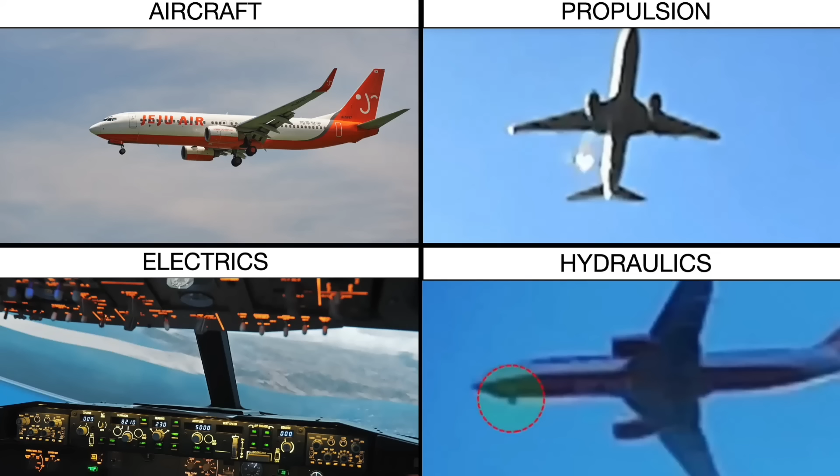Jeju Air Flight 2216 crashed on 29 December 2024 at 09:02:57 local time. The accident occurred at Muan International Airport in Korea. There were 179 fatalities and 2 serious injuries. The airport has been closed for the last 19 months.

A preliminary report was published, which was 6 pages long. An interim report was prepared for publication 7 months after the accident, but withdrawn due to protests by the families of the victims and the pilots' unions.

3 separate system domains now have to be explained: propulsion, electrical and data, and hydraulics and landing configuration. Can one physically credible initiating event explain all 3 outcomes without contradicting the known 737NG system architecture?

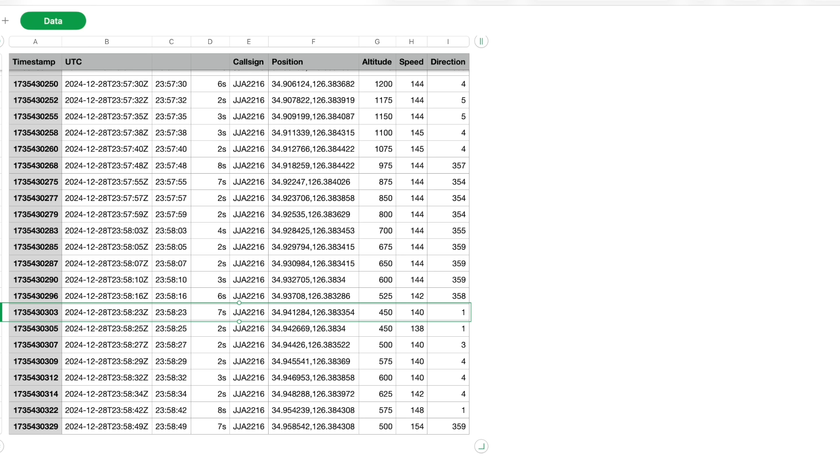The ADS-B trajectory indicates that the go-around had begun by approximately 08:58:23. About 3 seconds later, the KBS imagery captures an abnormal event at the right engine, consistent with the bird strike sequence. Subsequent examination found bird remains in both engines.

Was there more than one bird strike? Within seconds of the bird strike sequence, the aircraft suffered an unexplained loss of FDR, CVR, and ADS-B data. Whether one or both engine-driven generators had been lost at that point remains one of the important electrical questions.

Let's have a look at the aircraft history. The accident aircraft never had any prolonged stopover, downtime, or maintenance in the year before the accident. The aircraft operated on average 5.7 flights per day, with an average stopover time of 1 hour 30 minutes. It appears that all maintenance work was carried out overnight.

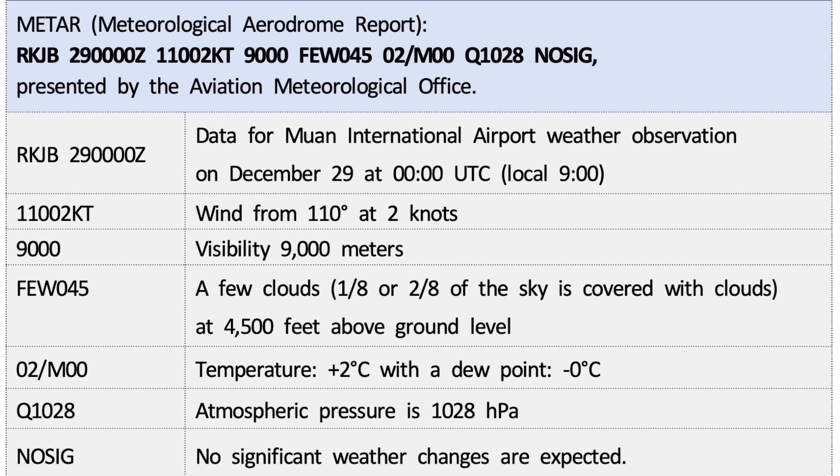The weather at the airport was +2 degrees centigrade, a high pressure of 1028 hectopascal, light winds at just 2 knots from 110 true, a few clouds at 4,500 feet, and 9-kilometer visibility.

The key questions that any investigation needs to answer: Number one, why did both the FDR and CVR stop recording simultaneously during the initial approach? Number two, what electrical power was necessarily available while an engine was still producing thrust? Number three, which hydraulic pumps could therefore still operate? Number four, did normal or alternate braking remain available? Number five, what electrical or hydraulic conditions would actually prevent landing gear extension despite the manual gravity extension system?

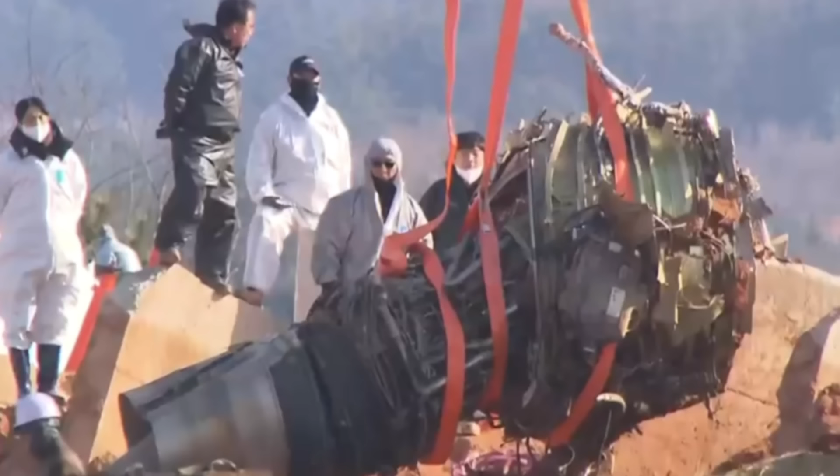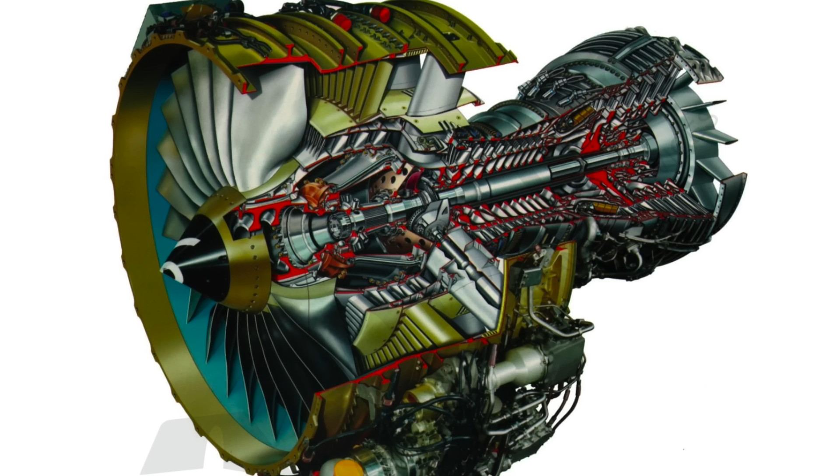Let's have a look at the engines. The accident aircraft was fitted with either two CFM56 7B26 or 7B27 engines. The Korean preliminary report does not specify the engine type fitted to HL8088. The engine identification, therefore, has to be established independently from Boeing, CFM, Ryanair, and Jeju Air configuration records. Each engine has an integrated drive generator with an oil cooling system.

Let's have a look at the radar system. Thales won a contract to install a STAR-NG and an RSM-NG radar system for Muan International Airport. The work was completed on the 31st of August 2024, which is 4 months before the accident. ADS-B stopping does not necessarily mean the aircraft disappeared from ATC surveillance. Muan had installed primary radar capable of tracking a non-cooperative aircraft. The question is, where are those radar data?

The STAR-NG has a 100 nautical mile range, 3D detection, and is an S-band system. The RSM-NG has a 256 nautical mile range, works in military mode 1, 2, and 3, civilian A and C, mode S, and ADS-B, and is an L-band system. That makes the STAR-NG data particularly important.

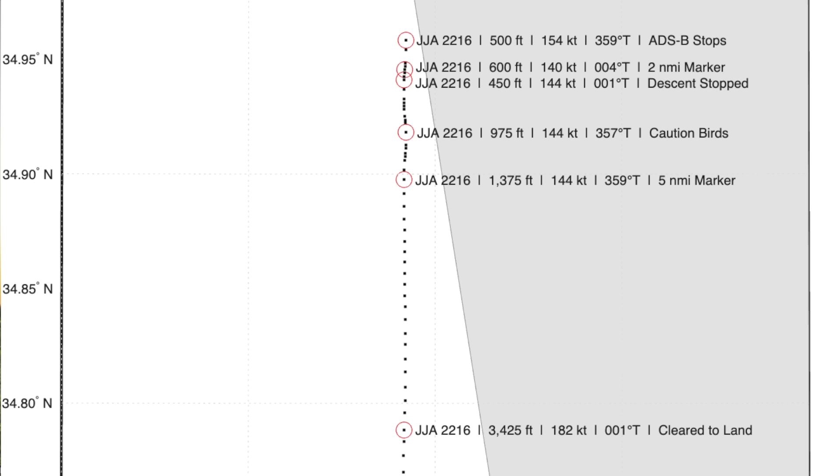The evidence establishes simultaneous loss of FDR recording, CVR recording, and ADS-B transmission. It does not yet establish that electrical power loss was the mechanism responsible for all three.

Approximately at 08:58:49, while HL8088 was still airborne at about 500 feet, three independent data functions ceased essentially simultaneously. The FDR and CVR are on separated electrical data paths, and the transponder installation is likewise redundant across the left and right electrical systems. The Boeing architecture is specifically intended to prevent a single electrical failure from removing all these functions.

HL8088 may have suffered two distinct major events: a dual-engine bird strike and propulsion emergency, followed at 08:58:50 by a separate catastrophic electrical or avionics system event that defeated multiple redundant and separated power data paths.

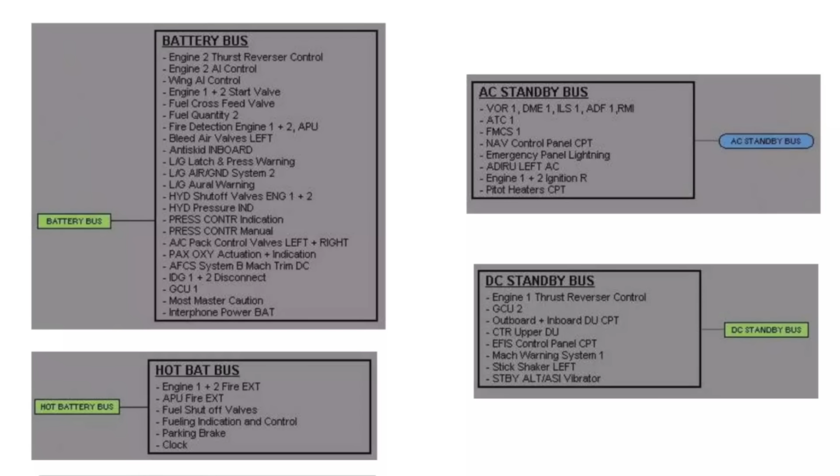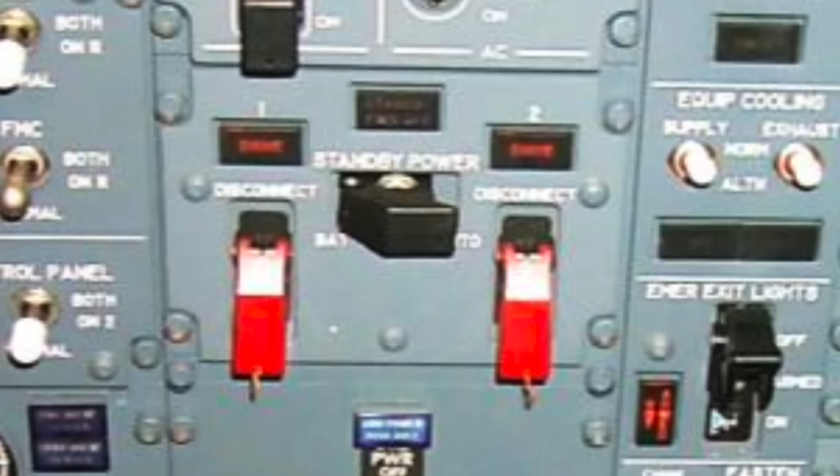Standby AC bus and standby DC bus automatically switch to their backup source upon loss of both engine-driven generators. The standby power off amber light should not be illuminated after the automatic switchover. If this light is illuminated, the first checklist to be started before the loss of both engine-driven generators is the standby power off non-normal checklist.

One consequence of the AC standby bus being unpowered is the ATC1 transponder is inoperative. Assuming ATC1 remains selected, as would normally be expected, the permanent cessation of ADS-B at around 08:58:50 is consistent with the loss of the AC standby bus, not merely loss of both engine-driven generators.

ATC-1 is the normal default selection. The crew can select ATC-1 or ATC-2 using the selector on the P8 aft electronics panel.

The ADS-B record shows a completely stable surveillance function throughout the Bangkok to Muan flight: 739 uninterrupted received data points, averaging 23.369 seconds between each data point. The only small gap was for 5 minutes whilst over the East China Sea between Taiwan and Japan.

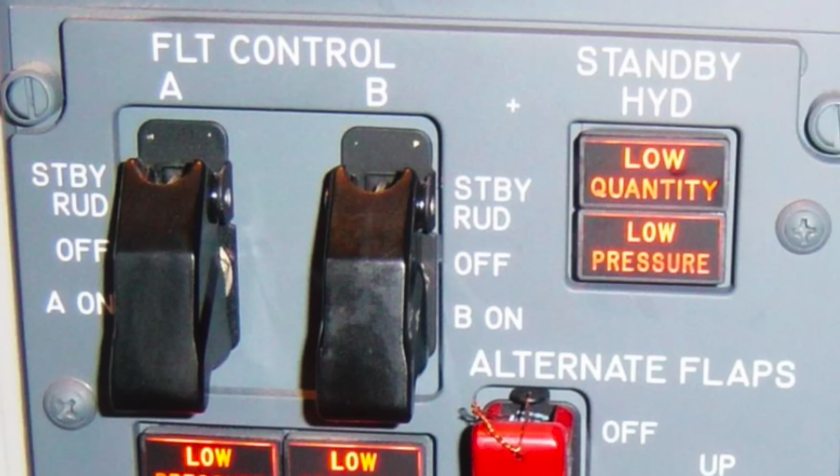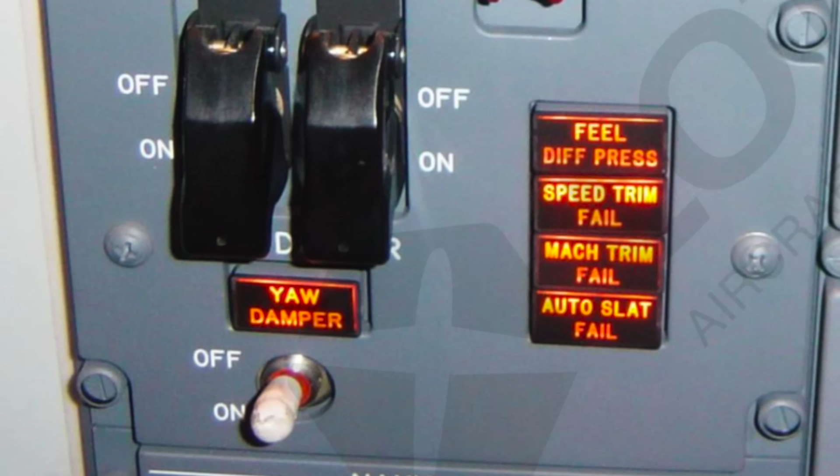The open hydraulic questions are these: What hydraulic capability remained after the dual bird strike? Were the electric hydraulic pumps available? A major electrical failure could affect the electrically driven hydraulic pumps, even if some engine-driven hydraulic pressure remains.

Was normal landing gear extension attempted? On the 737NG, normal gear extension depends on System A hydraulic pressure. The shutdown of the left engine removed the normal engine-driven source of the hydraulic System A pressure. Whether System A remained available then depended, among other things, on the availability of its electric motor-driven pump and the electrical supply feeding it.

If normal landing gear and flap extension were unavailable, why were backup alternatives not used? The backup manual gear extension system mechanically releases the up locks and does not depend on normal hydraulic pressure.

Was there any mechanical reason the gear could not free fall and lock down? Possible issues would include uplock damage, structural deformation, jammed gear, or damage caused by the bird strike or subsequent maneuvering.

Was the gear deliberately left retracted? If so, what was the crew's reason? Drag reduction, uncertainty over remaining thrust, concern over braking or directional control, or preparation for a deliberate gear-up landing?

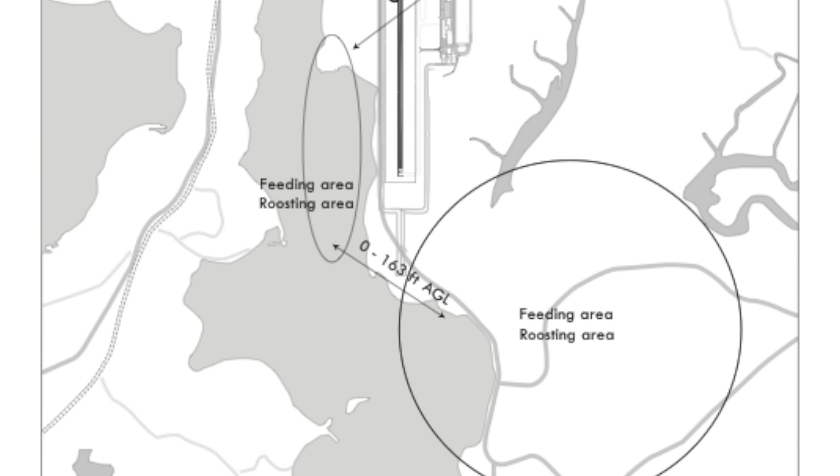Bird strike was not an unforeseen environmental hazard at Muan International Airport. The Korean AIP had for years explicitly identified significant resident and migratory bird concentrations associated with the airport's surrounding wetlands and seashore, including winter season bird activity during morning operations and documented active bird strike mitigation measures.

The following is taken from a report published on 19 November 2020. The seashore and wetland are situated near Muan International Airport, and provide good nesting habitat for both resident birds such as the black-billed magpie, ring-necked pheasant, rufous turtle dove, tree sparrow, mew gull, and migratory birds such as mallard, grey heron, egret, and house swallow.

Mallards inhabit around the airport during winter season, normally October to March. Mallards are active during morning and evening, flying at high altitude. Grey heron and egret inhabit during summer season, normally August to September, and are active during daytime. Most resident birds are active during daytime and fly at low altitude.

Muan International Airport strives to prevent bird strikes by implementing both non-lethal techniques, such as gas cannons and playback of distress calls, as well as lethal techniques, such as live ammunition shooting during airport operating hours.

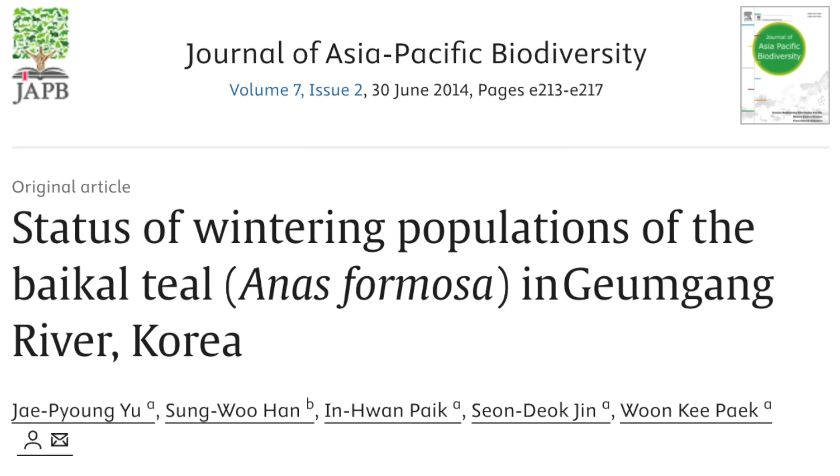The Baikal teal is specifically important in this case. Muan Airport lies within a major Baikal teal wintering region, and its runway 01 approach corridor crosses a landscape containing the same combination of sheltered water, reclaimed agricultural land, and feeding habitat that supports very large wintering aggregations elsewhere on the Korean western coast. One scientific survey of the Geum River estuary wintering area in 2008 recorded 500,000 Baikal teals.

Boeing states that the probability of a total and unrecoverable AC power failure is remote because of the system design. A non-normal checklist for accomplishing an approach and landing on standby power is not required. Manual pressurization control and manual stabilizer trim are required.

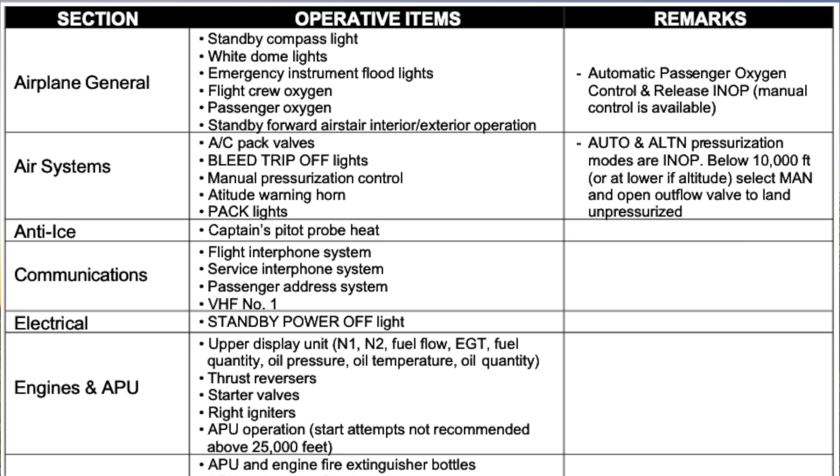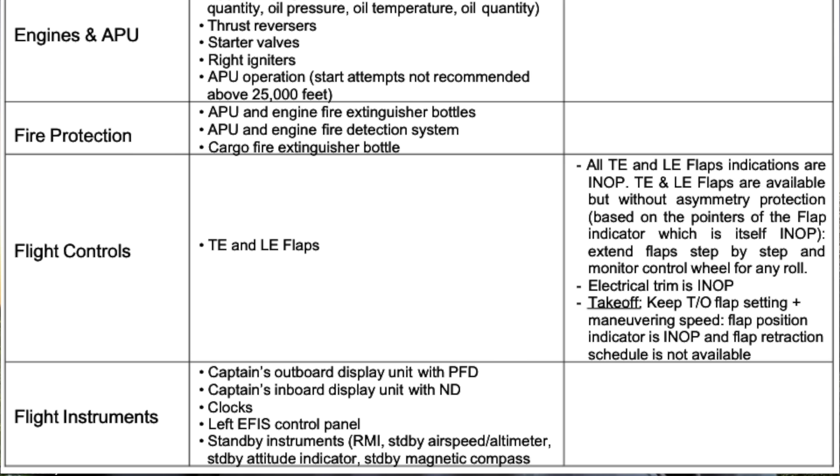The left navigation radios and communication radio are operable on standby power. The captain's electronic flight instruments and left FMC are available. Only partial anti-skid is available, so excess approach airspeed is undesirable.

Brake with caution. The flap position indicator is inoperative. Auto brakes and auto speed brakes are not available. Reverse thrust is available.

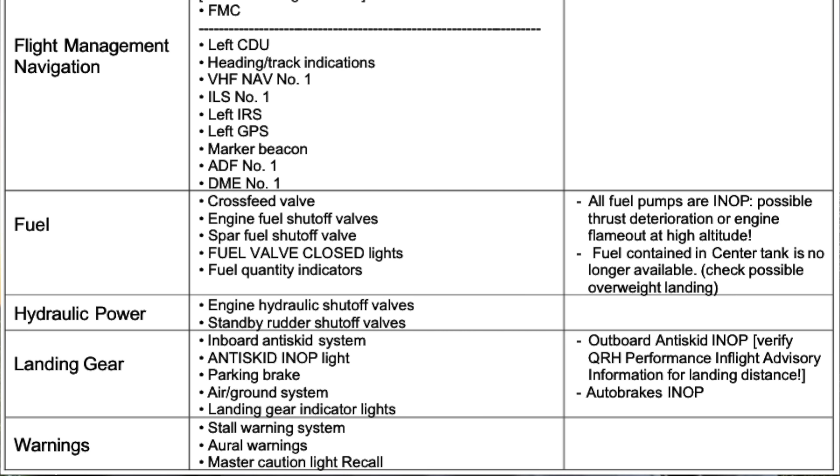So, in summary, the accident sequence started with the ATC tower cautionary message of bird activity and the flight crew's decision to abort the landing and go around. 3 seconds into the go-around, at least one bird strike occurred. The FDR, CVR, and ADS-B data all stopped essentially simultaneously, within 24 seconds of the initial bird strike.

6 seconds later, a Mayday emergency was declared for a bird strike during the go-around. There is no evidence that the APU was started. They had shut down the left engine, removing the System A engine-driven hydraulic pump. The right engine was damaged, but apparently continued producing useful thrust.

What hydraulic capability remained in Systems A and B therefore depends critically on the state of the electric hydraulic pumps and the electrical distribution system. Were the electrical hydraulic pumps available? A major electrical failure could affect the electrically driven hydraulic pumps, even if some engine-driven hydraulic pressure remained.

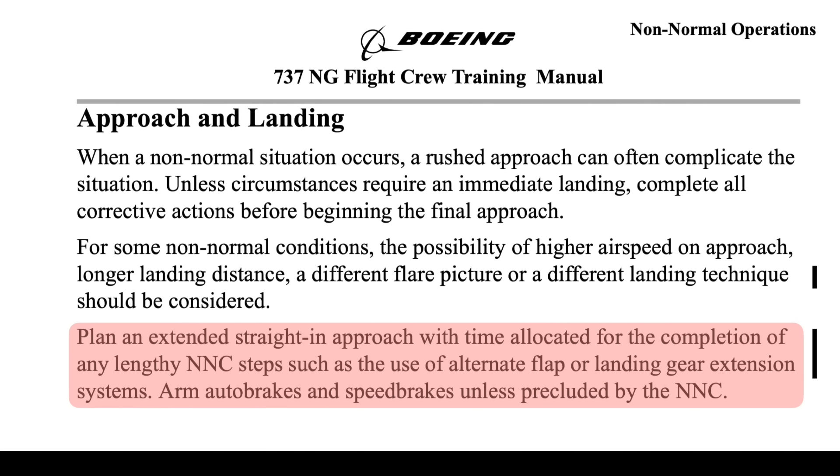Boeing explicitly tells crews facing exactly these kinds of lengthy, non-normal checklist actions to, and I quote, plan an extended straight-in approach with time allocated for the completion of any lengthy NNC steps, such as the use of alternate flap or landing gear extension systems.

Jeju Air 2216 did almost the opposite. It made a rapid, low-level reversal and returned to runway 19, arriving approximately 4 minutes after the recorder cessation, still with both gear and flaps retracted.

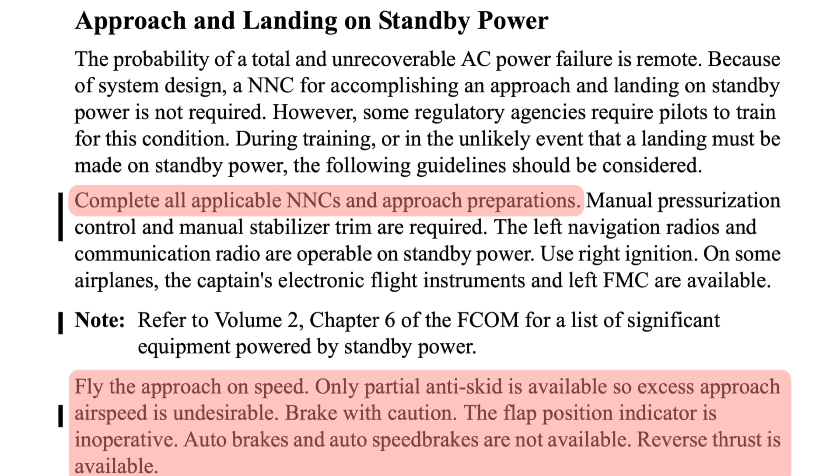The crew may have known that the aircraft had suffered a major degradation of its normal hydraulic and electrical configuration systems, but elected or were forced by circumstances to get the aircraft onto the ground before there was sufficient time to complete the alternate procedures.

So what is our conclusion? The evidence presently available does not support reducing this accident to a simple pilot error explanation. The evidence points to a complex interplay of 2 or 3 system degradations.

Number 1, the propulsion degradation following bird ingestion into both engines. Number 2, an unexplained electrical and data system degradation associated with the simultaneous cessation of FDR, CVR, and ADS-B data. Number 3, a possible hydraulic and configuration degradation affecting normal landing gear and flap extension.

Are these 3 consequences of one physical event, or 2 interconnected failures, or 3 separate problems occurring within seconds of one another? Until an accident reconstruction can trace a physically credible path through the actual Boeing 737 NG architecture, bird strike is the beginning of the explanation, not the end of it.